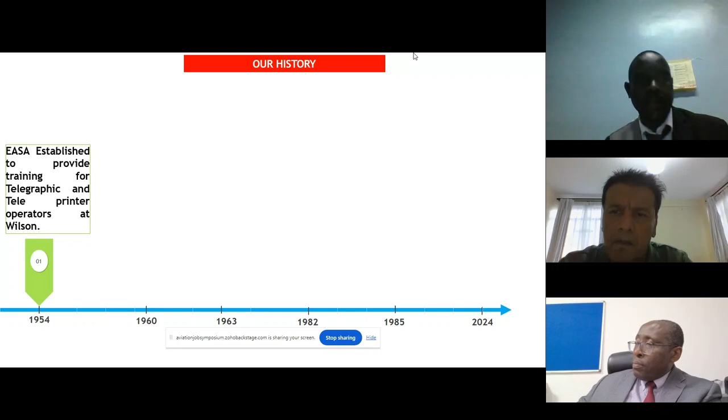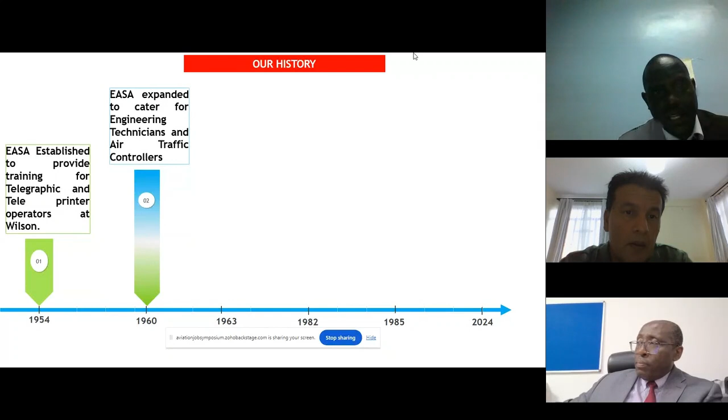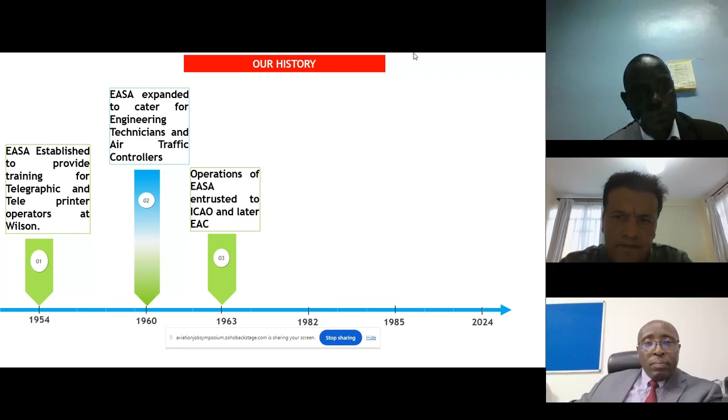The brief history of the school is that the East African School of Aviation was established to provide training for telegraphic and teleprinter operators in 1954 by the British government. In the 1960s, the mandate of EASA was expanded to cater for engineering technicians and air traffic controllers. By 1963, the operations of the East African School of Aviation were entrusted to ICAO and the East African community.

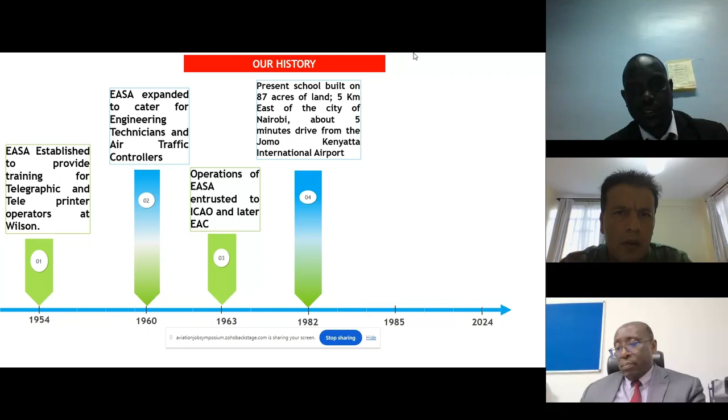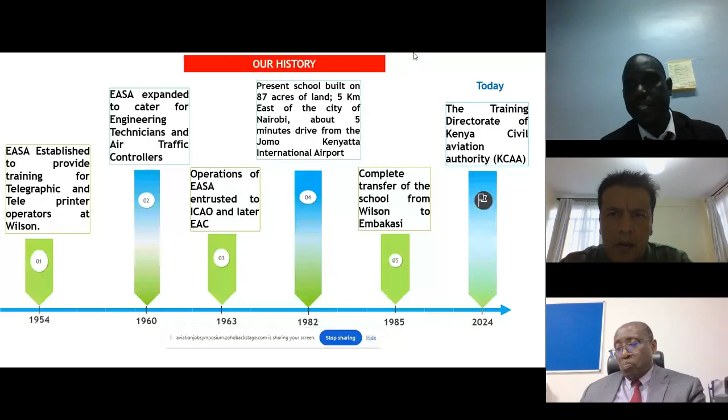In 1982, the school was built in the present day location on an 87-acre land, 5 kilometers east of the city of Nairobi, and about 5 minutes drive from the Jomo Kenyatta International Airport. All the services of the school were transferred to Embakasi from Wilson by 1985. Up to date, the school remains the training directorate of the Kenya Civil Aviation Authority.

The mandate activities of the school include providing competency-based training for the authority and the aviation industry, to provide competency-based training for Africa and Indian Ocean region, that is the AFI region, as a KCAA RTCE agreement. The other mandate is to develop and implement standardization of curriculum for aviation professionals programs. The other mandate is to implement training policies relevant to the approved training organization, and to establish and coordinate research and development.

Finally, the other mandate is to establish and execute beneficial partnerships and collaborations with industry, academia and aviation training academies. Some of our partners include our parent organization, the KCAA, IATA, we have Moi University, we have TRAINAIR PLUS, we have Kenya Bureau of Standards, we have Federal Aviation Administration, we have Incheon Airport Aviation Academy, and we have Singapore Aviation Academy.

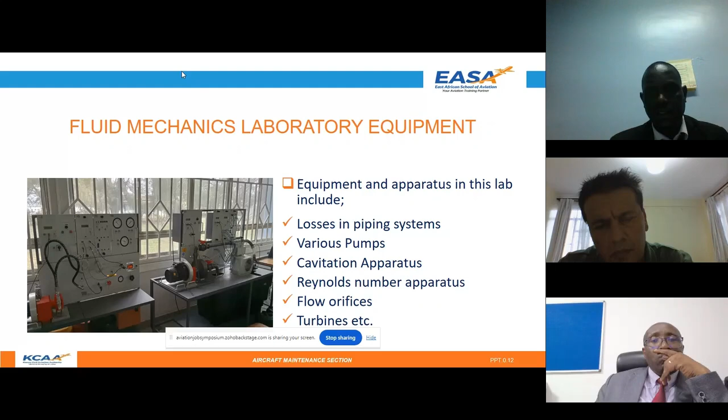In this lab, you will find apparatus like pumps, cavitation apparatus, Reynolds number apparatus, flow orifices, turbines, some bended and curved pipes, so that we can demonstrate the losses of pressure in pipes.

We also have an applied thermodynamics lab, the lab that gives the trainees a practical understanding behind the scientific principles of the relationship between heat and work, and how heat energy from various fuels can be converted to mechanical work.

Next, in our list of labs and workshops, we have the hydraulic systems laboratory, which is a lab equipped to enable the trainees to diagnose faults and snags in aircraft hydraulic systems.

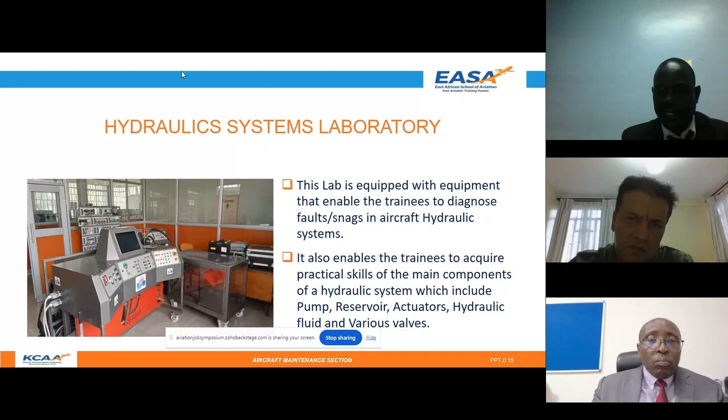In this particular lab, we selected two systems, that is the landing gear and the flap, which is a flight control. This lab also enables the trainees to acquire the practical skills to maintain various hydraulic systems, components and subsystems that include pumps, reservoirs, actuators.

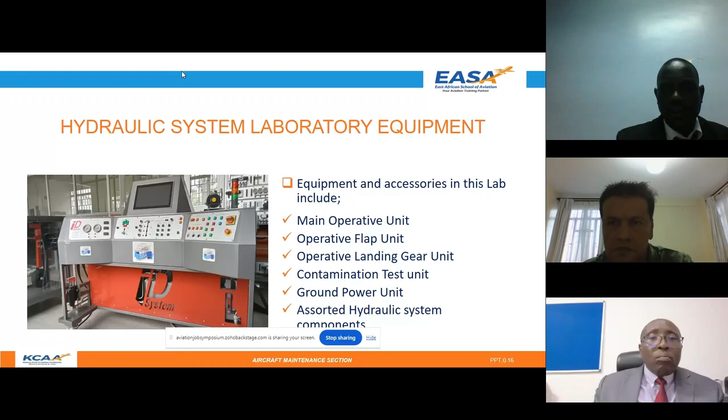In this lab or equipment, we have various valves, the main operative unit, the operative flap unit, the operative landing gear unit, the contamination test unit, the ground power unit, and assorted hydraulic system components.

We also have a very well-equipped power plants workshop in which we have various types of aircraft, both cutaway, runnable engines, and engines which the students practice on to dismantle, inspect, clean, and assemble.

We have a runnable piston engine, we have a non-runnable piston engine for assembly and disassembly, we have a cutaway gas turbine engine and a cutaway piston engine. We also have a GPU and associated equipment for each engine.

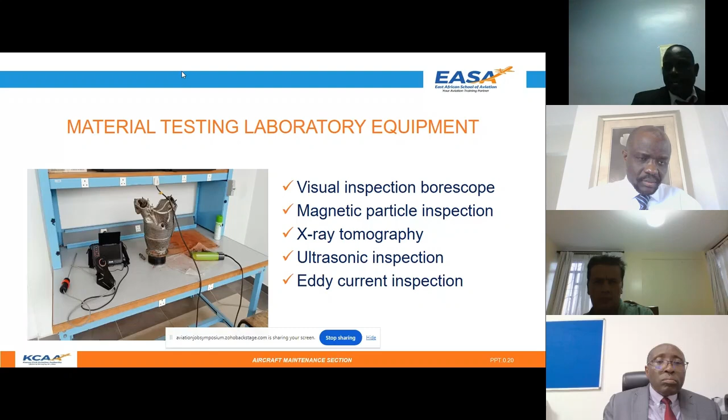Beneath, we have various inspection methods or units. We have a visual inspection borescope. We have a magnetic particle inspection equipment. We have an X-ray tomography. We have an ultrasonic inspection equipment. We have an eddy current inspection equipment.

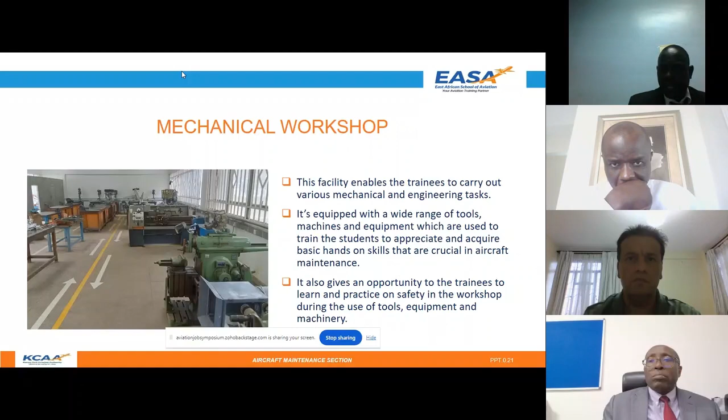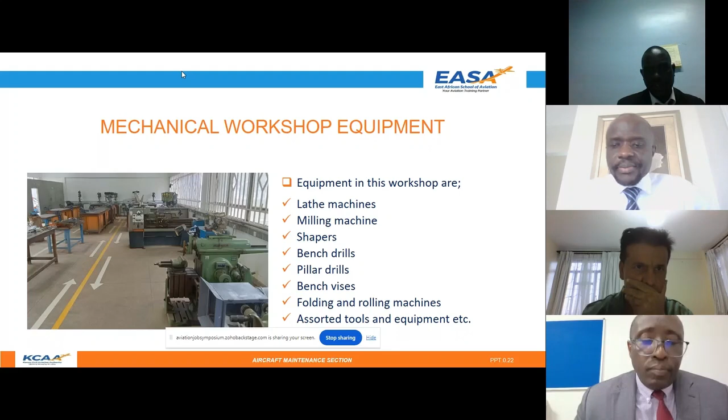And finally, we have our mechanical workshop where the trainees start their life in aviation so that they can acquire the skills in sheet metal, forming, bending, cutting, filing, care of tools, maintenance of tools, welding, and all other kinds of skills an aircraft maintenance technician will be required to have.

Some of the equipment we have in this workshop are the lathe machines: the milling machines, the shaping machines, the bench drills, the pillar drills, bench vices, folding and rolling machines, and assorted tools.

In summary, equipment and simulators play a crucial role in addressing changes and improvement in the aviation industry by providing hands-on, practical, fascinating, and deeper understanding of complex systems.

By integrating these technologies in terms of equipment we have shown you in our training, the East African School of Aviation ensures that our students are well prepared. Thank you.

Edward, thank you so much. Really, if you don't mind, please just share the presentation. We can share it with the students and our panelists.

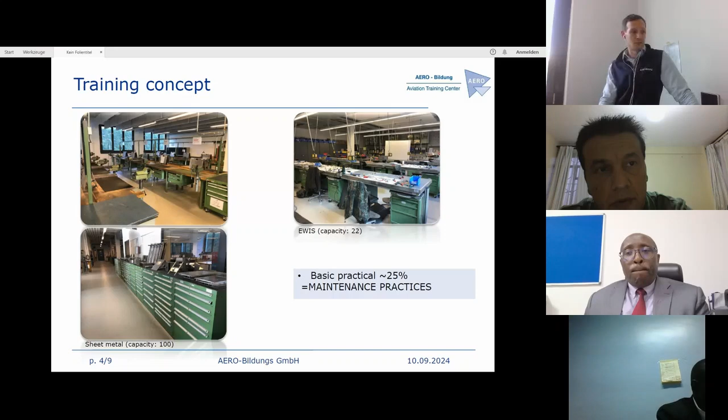After gaining some knowledge and theoretical understanding, and some first hands-on skills, usually when they are really fresh students, they continue here with EWIS training. EWIS is getting more and more important for aviation. We can accommodate about 22 students at the same time. This is also still part of the basic workshop training.

After that, they continue, depending on the path, with the engine shop. We have turboshaft, turbojet, piston engines, and all kinds of engines where you can learn and get hands-on with real aircraft parts. Approximately 10% is usually spent there because, as all aviation professionals know, a B1 or A1 is not really allowed to do so much on an engine any longer - this is usually done by the manufacturer.

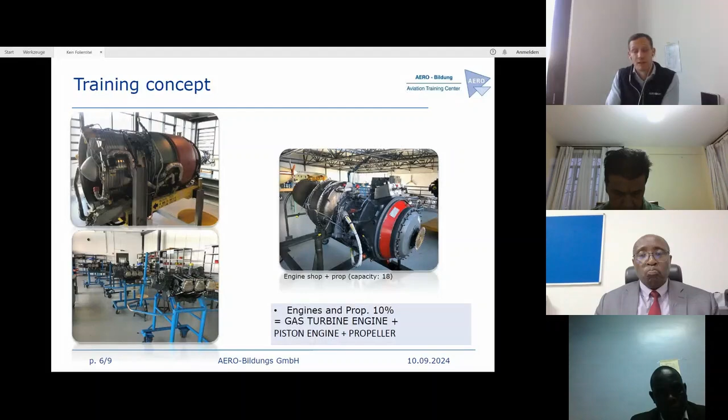At the last stage, a very important stage, you go up to one of our training hangars - one of our two training hangars. On the left side you see one training hangar. On the right side you see the helicopter training hangar, which is currently undergoing some changes - that's why it looks so empty. We are just moving all the helicopters over there, so it's not yet full.

But what we have is a more or less fully functional Dornier 328, or Dornier 228, for practical training. We have two Alpha jets there, and a piston aircraft. And of course we have some helicopters, which in our case are the BK117s. We also have one CH-47 military helicopter, a big one, and one mock-up for the CH-47, because we're in partnership with Boeing to deliver the training for the German Air Force.

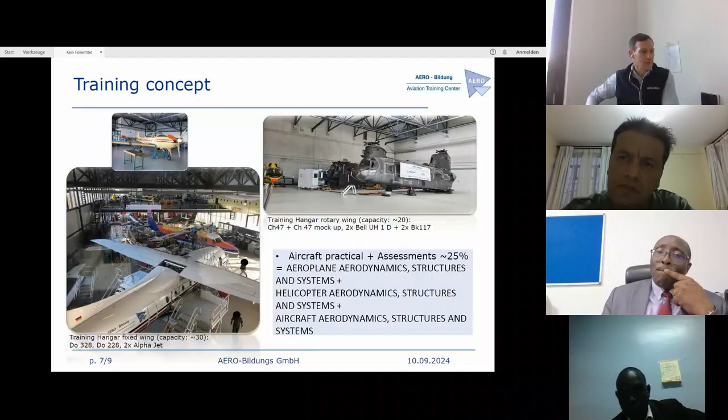More or less that's it. Very fast, very rough, but I hope I could give you some insights into how our training facility, and such a training facility, can look like and looks like. I think, Charlotte, if you or anybody has a question, you can forward it to me later on and I'm happy to answer it. And I hope I'm in time. Let's see - thank you very much.

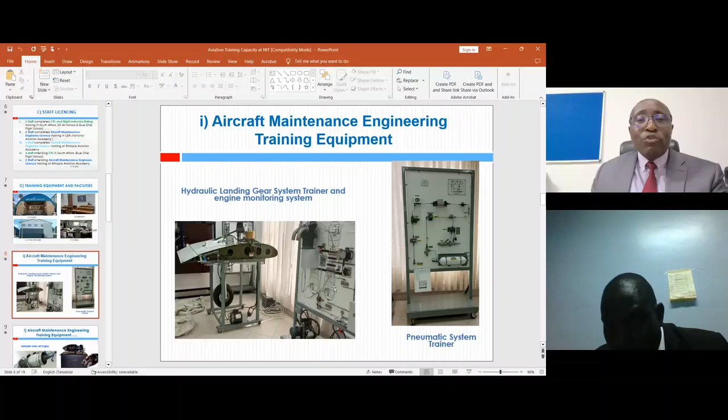Now, when it comes to facilities for aircraft maintenance, you can see some facilities there. You have the pneumatic and hydraulic systems. You also have the landing gear system trainers and engine monitoring systems, as you can see there.

And we also have engines, including a runnable turbojet engine which is live. It is made to run, so it's like a demonstration. Students can be able to see, and we have some motorized cutaway displays, as you can see there.

We also have the landing gear system trainers, which have all the systems required, and we also have the software where we use computers to train students before they go to the real demonstration of the trainer that you can see there.

We also have a special room called the Virtual Maintenance Trainer, VMT, where students interact with the instructors. The students have to diagnose a problem in the computer, and at times the instructor can put a fault in the system, and the student will be able to identify that fault and come up with a solution to fix it.

Also, at times they are given some assignment through this virtual maintenance trainer, and this helps much to simulate several scenarios that the aircraft maintenance engineer can face on the ground.

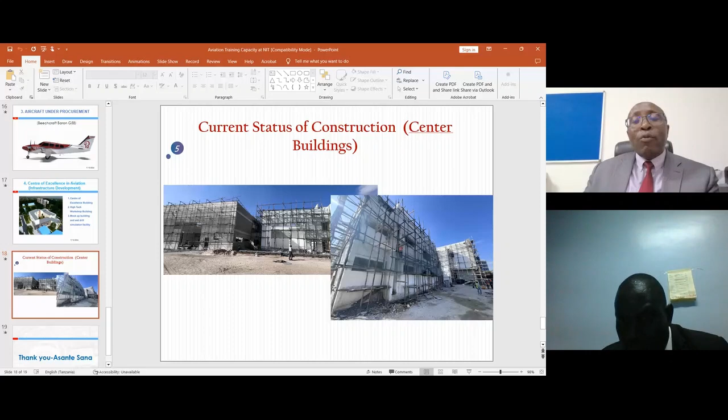As I'm speaking now, this facility is under construction, and this is the progress so far. We expect that by the end of this year the facility will be ready, and we will be able to install all the facilities and equipment that we have purchased. With that, I think that is an overview of NIT.

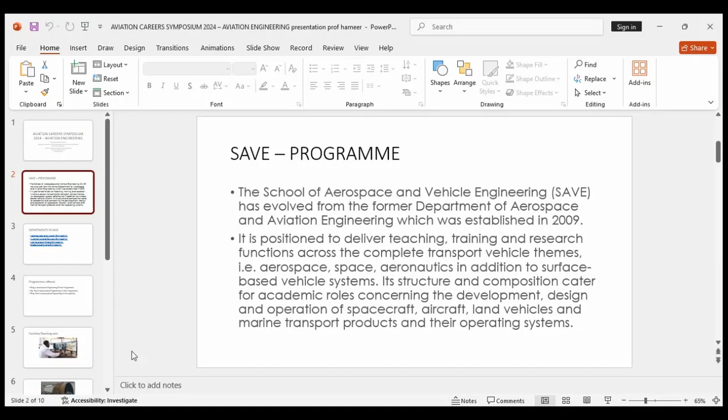So I talked about the departments in SAVE. These are our 4 departments. Only one is functioning currently; the other 3 are being capacitated.

When I come down to the programs offered, we have a Bachelor of Engineering in Aeronautical Engineering, which is a 5-year program. Remember, there was a discussion today about the output or throughput of the knowledge-based economy, of which we are a part. Knowledge-based economy produces the human talent that the industry hires. So the industry serves as the employer, and the university system serves as a manufacturer of the human talent. And that knowledge-based economy trickles into a mineral-based economy and the whole technology that surrounds it.

And we must remember that sometimes when you look at a B.Eng, which is synonymous to a Bachelor of Science, it is more centric on design, so testing of higher cognitive capabilities, more design-based. When you look at a B.Tech program, Bachelor of Technology, it concentrates more on the psychomotor skills, that's where now the licensure comes in.

And if you look at our program, we have actually worked on a program called the B.Eng Tech in Aeronautical Engineering, which is based on the EASA Part 66 modules in terms of acquisition of the AML, aircraft maintenance license. So we have driven it in that direction such that licensure can be ascertained or achieved through that program. And one of the key things of that program is we developed it, and we are just awaiting some administrative clearances at university level before it is approved and launched into the system.

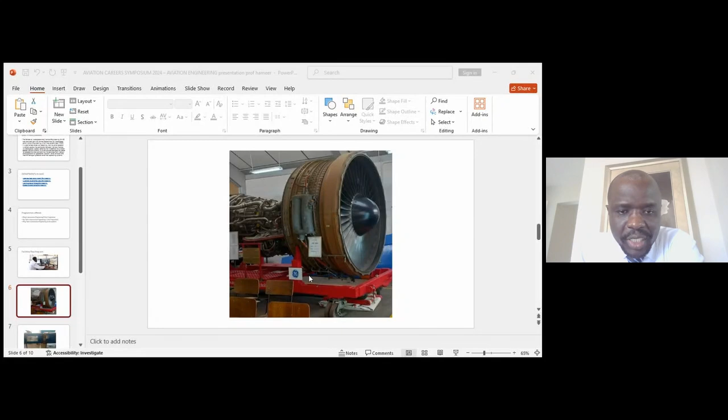Then I come down to the aircraft engine that we have in our laboratory. Yes, Prof, just a second—we are managing this time and may run a risk of losing other panelists. I would request if we could have this presentation shared, and you probably just... I'm just finishing up. Let me just finish up, please.

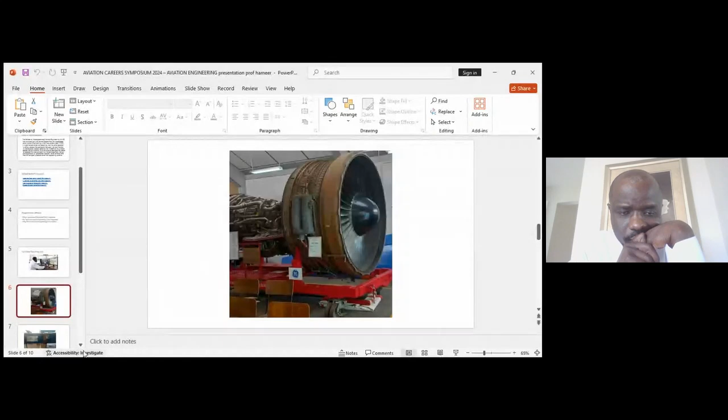We also have a propulsion system laboratory, aerospace system, where we house the CF6-80C2A2 aircraft engine from the Boeing 767 turbofan engine for training. We also use domesticated partnerships with University of Nairobi—you can see a wind tunnel, 40 meters per second, and also the compressible flow experiment.

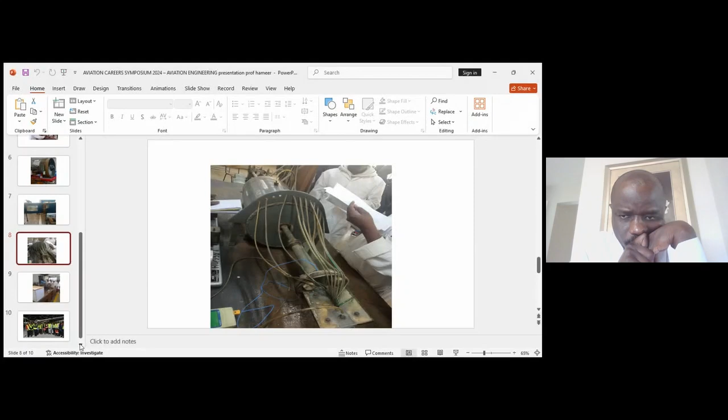So we tend to diversify our facilities in terms of teaching and training. We also have the Venturi meter, and we use the mechanical engineering workshops and laboratories, very sophisticated, at the Technical University of Kenya. And then finally, our cohesion with industry.

You can see here my gas dynamics and jet propulsion class doing a practical at Hawk Aviation to understand how a turboprop works. We also work with Mr. Ben from Avionics Care in terms of capacitating our students through mentorship, for our year 3 and year 4 students, before even getting to industrial attachment.

That's all I had to say regarding my presentation. I wanted to talk about our university and our program in terms of industry needs. Our students are the most sought out, serving in various places at the National Airline KQ, Wilson Airport, KCAA, and so forth. As a university, as a school, we have graduated 9 cohorts already. This is quite an achievement, and we look forward to collaboration and further engagement such that we can attain the sky and above it. Thank you very much.